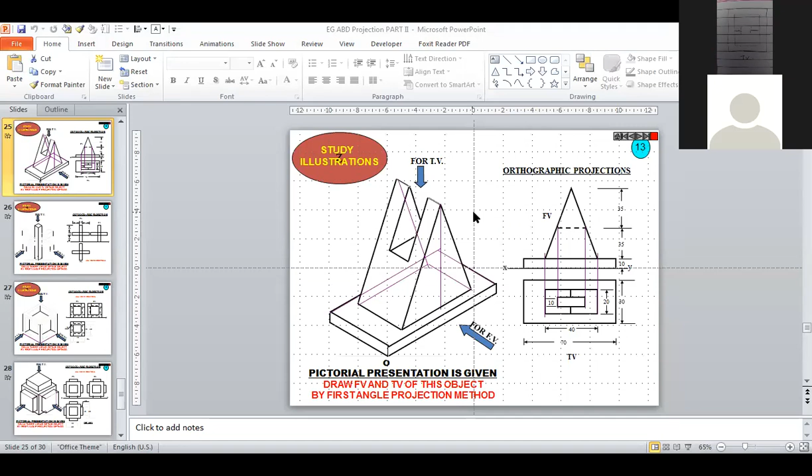Okay, who is showing this? Rishi, take it near. First of all, show me front view. What I told you, you should follow the projection method here. Why are you drawing your top view inside of the front view? Will it come like that? Okay, it seems correct. Now show me top view, and use blank paper so that you will be having practice. Okay, fine. Anyone else?

Tushar, show me. CH020, CH023. Yes, show me. Correct. Nice. You are using projection. You are doing it with a drafter or something like that? Scale. Okay, nice, nice, very nice. Correct. Also draw side view. Those who have completed front view and top view, draw side view.

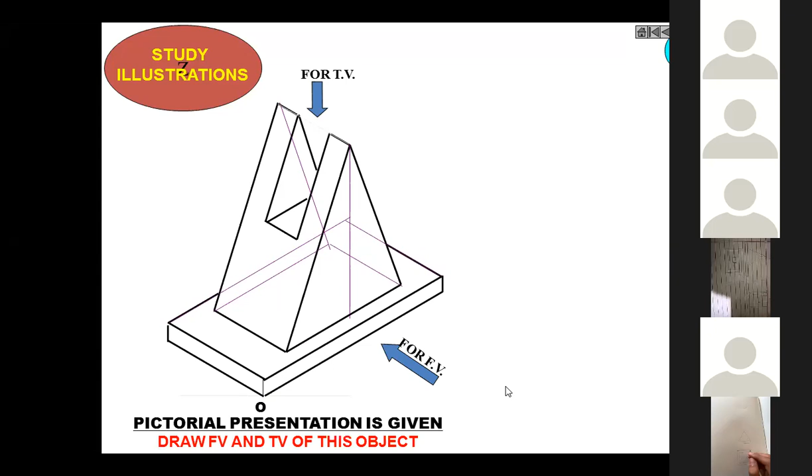Rotate it anti-clockwise. Yes. Okay. Show me the front view. Top view, yes. In top view, you are missing one or two lines. I'm not able to see it clearly. Okay, fine. Now I will show you the answer. You have that question separately, snapshot or screenshot, and answer also.

Now this is the front view. First of all, see the answers; these are the projections, and these are the top views. First of all capture the screen, because it is having dimensions also. Which dimension method is this? Unidirectional. Very good. Unidirectional, correct. So this answer is having dimensions also, so you practice it accordingly. It will give you more and more confidence. When we perform the sheet, it will be very helpful to you.

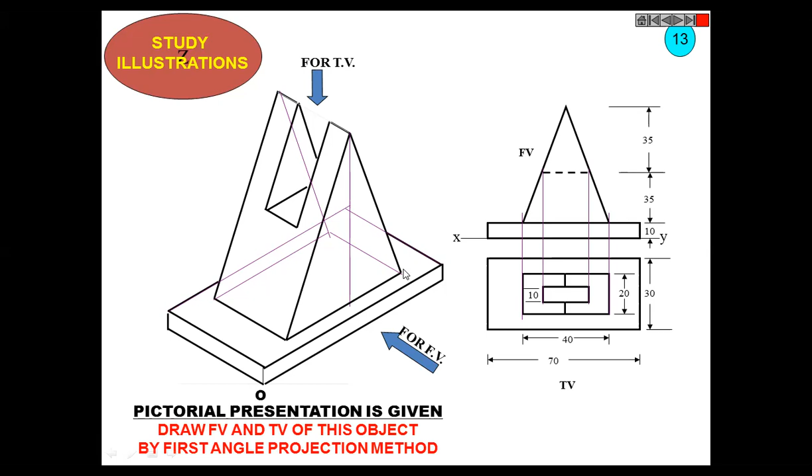See, this simple problem can come up to 10 marks. Understand? So you will get big marks by doing it quickly, and you need not study separately. You just focus within class and prepare your sheet and drawing sketchbook. Honestly, that's it. That is done for the exam, believe me.

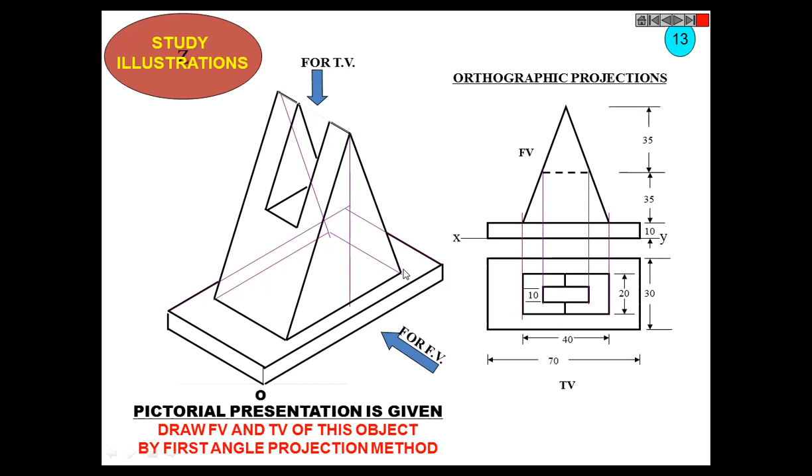Okay, so this is the orthographic projection. Now we will see the next problem. Now do it fast, all three views, front view, top view and side view, quickly. Only 3 minutes I will give, 1 minute for each view. If you complete, then start broadcasting.

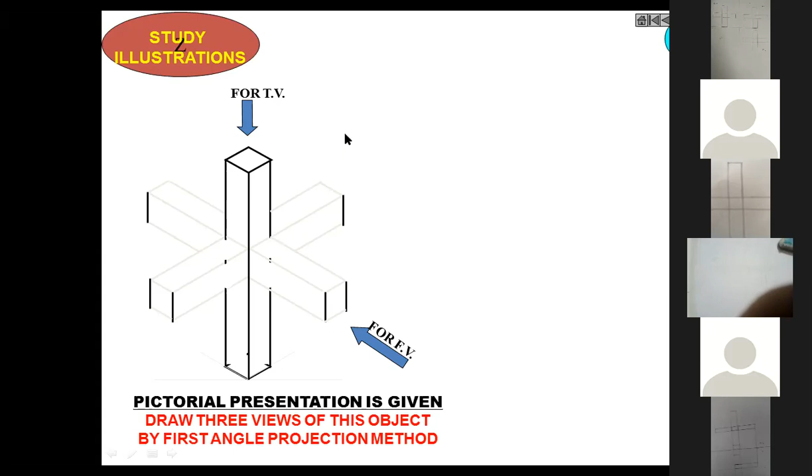Take it near, 21 number. Still. Yes, correct. Very good. Next. 012, 017. Yes, that is correct. 12 number correct. 16 number. Come on, fast. How can I know you have completed unless you show me?

Chalo, show me. Okay, Deacon, take near. Yes, correct. Priyanshi, take near. Yes, correct. Chaitanya, take near. See, Chaitanya, you are taking advantage of these lines. It should not be like that. Practice on blank paper. 018 number, show me. It is a bit blurry. Okay, fine, correct. Okay, this 015 number.

Can you hear me? Yes, sir. So, which projection method have you drawn in? You can't draw all views in a single line. What are the two projection methods we are following? What is asked? First angle. So you practice in first angle only, so it keeps repeating. If it gets repeated, you won't have confusion in the exam. Okay, sir. Practice as if you are doing the exam every time.

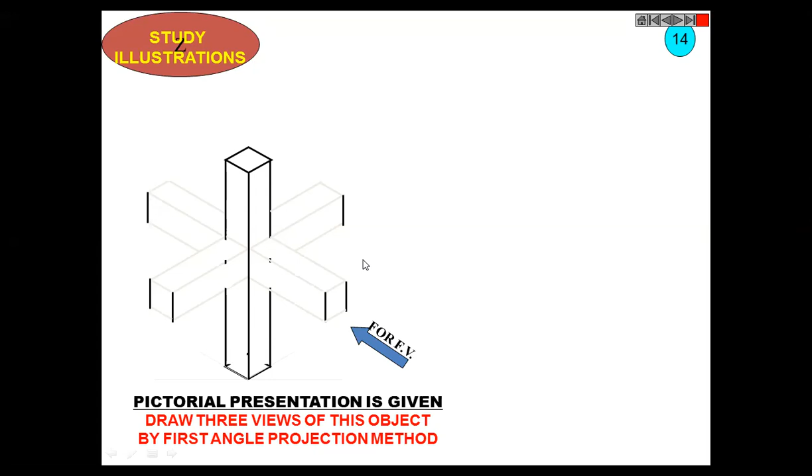Understand? So at times in orthographic view, you may be asked to draw the missing view also. What do I mean? Generally, orthographic projection means you will be given this problem and you are required to draw all three. But at times, for any problem, two views are given and you are told to draw the missing view. Missing view means the third one.

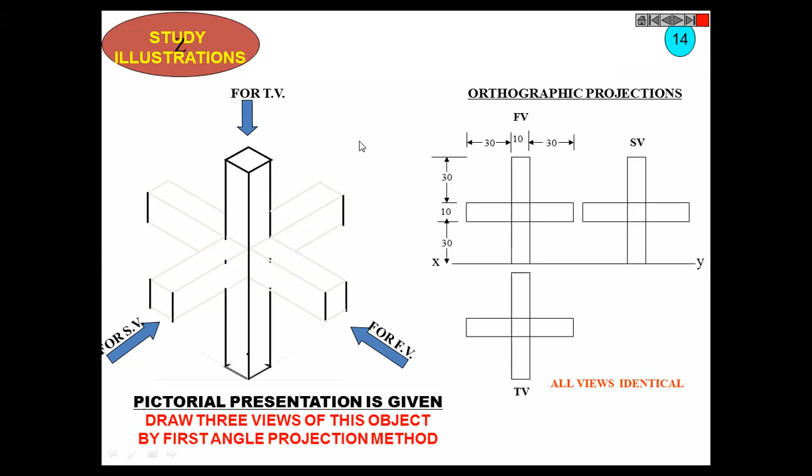We focus on three views: front view, side view, and top view. Any two views are given so that most information is covered, and you will be asked to draw the third view. So you should imagine it very precisely. You should have very accurate imagination power. It's very simple. Practice will make it happen. Chalo, fast. This should be done within 2 minutes maximum.

Now let me divide you. Roll number 1 to 10 front view, 11 to 20 top view, 21 onwards side view. Fast. Chalo, show me. Anyone from 1 to 10 number.

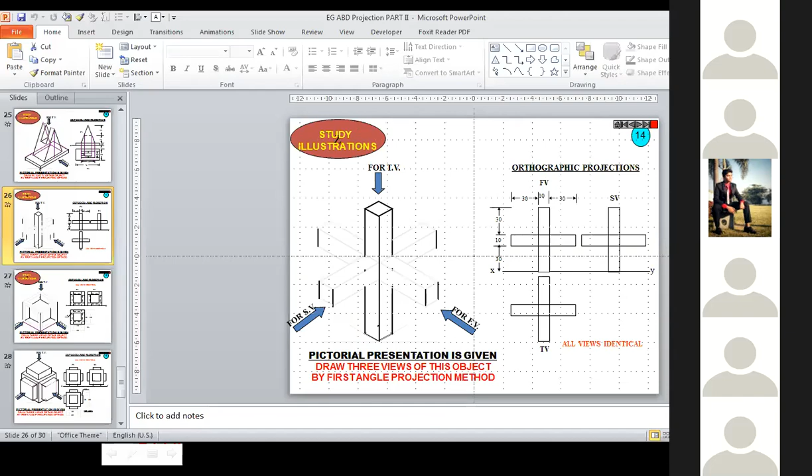Okay, Arjun, take it near. Just a moment. Okay, Arjun, take it near.

We are having this corner, some lines. In every corner, two lines, small perpendicular lines to each other. Why they won't come? Take it near. We are also having axis line. They won't come, this inclined line. Just think over it.

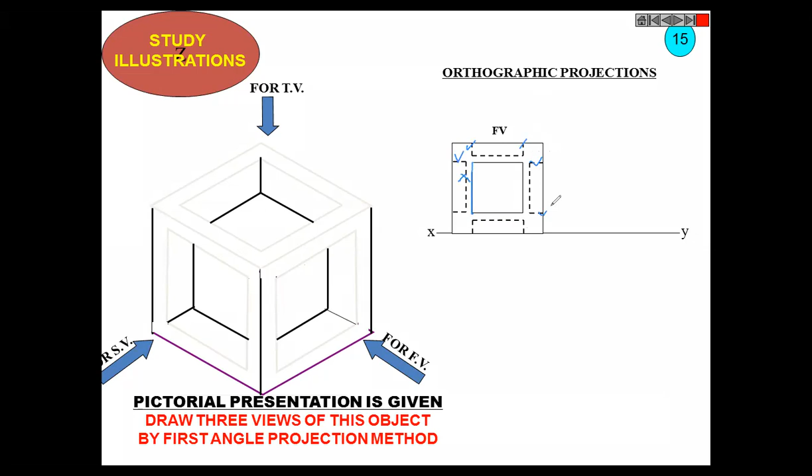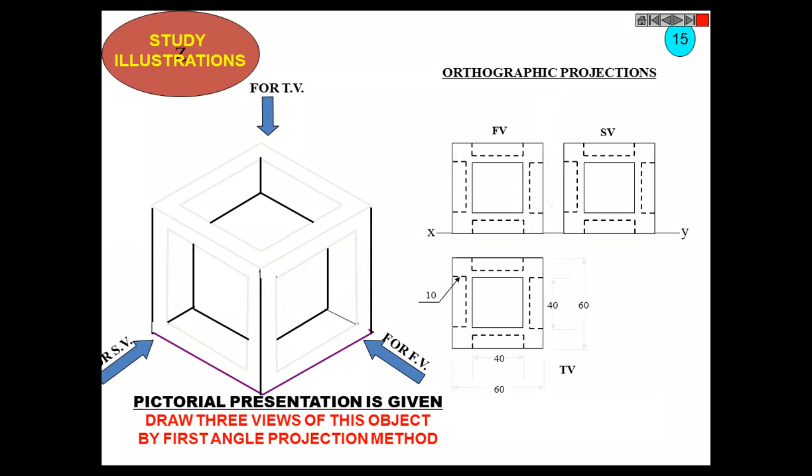Yes, sir. Okay, so let us do one more problem before we move to something else. So all views are again identical, understand? Okay, yes, now last problem. Do it fast, two minutes only.

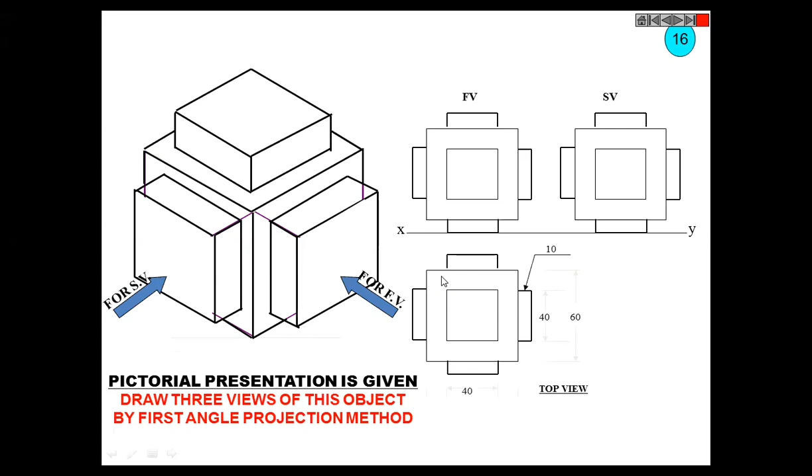Okay, let us see the answer. We just see all these are identical, and the nice thing is that whenever you have such a problem, see all the projections. If you learn projection precisely, everything is projected only. See, this is all projected. If you have one view, all things are projected. Look at this, it should be drawn like this. Everything is projected, everything. Isn't it?

Like this. So these steps what I was talking about should be of same height and thickness because they are same, they are not varying. They all are same. Understood? So these are the Yes.

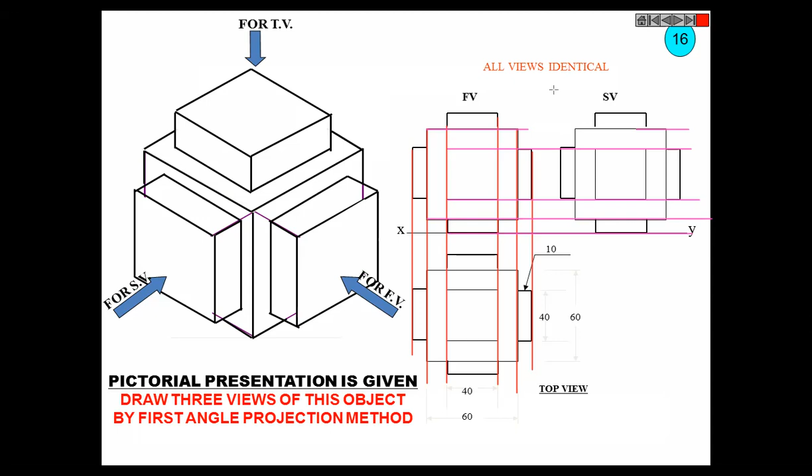Simpler problems. Okay, now we will start another topic. Okay.

Now everyone pay attention to the new topic.

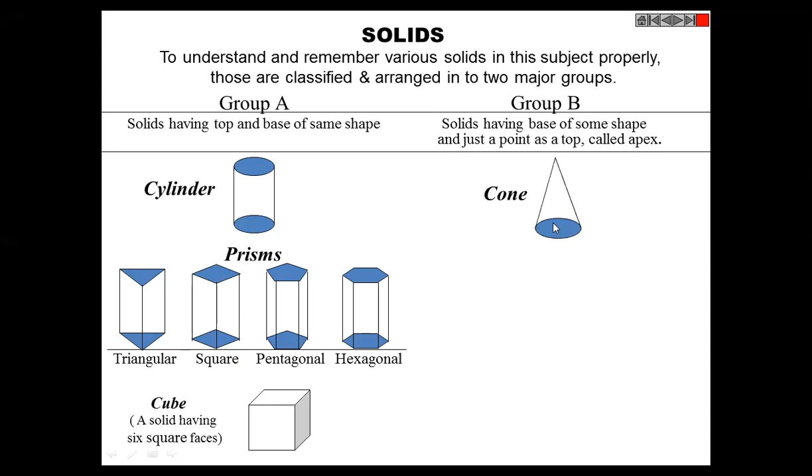Am I audible? Yes sir. Now we will see cone. Here we said cone, so this is the cone. We are having some base at circle, base at bottom, and then we are having a top point only, which is called apex. So this is cone.

Sorry, wait a minute, may need to stop, I'll just share it back.

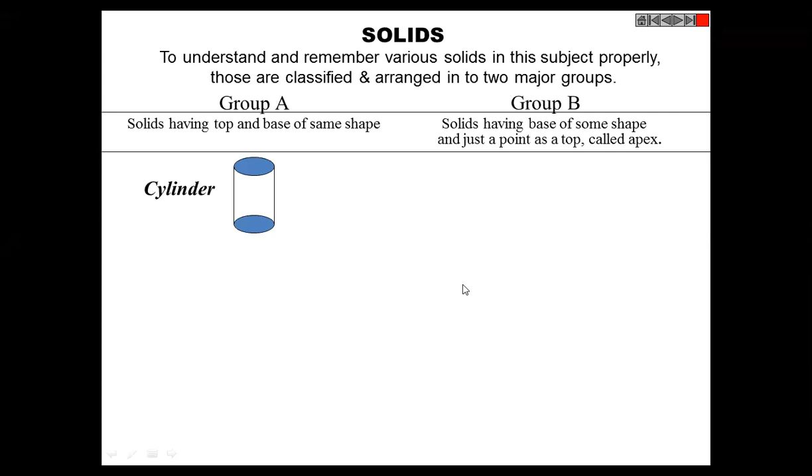Understood? Prism and pyramid, difference between prism and pyramid, got it? Did you get it or not? Yes sir, yes sir, okay.

Now tetrahedron. Now we were having a special case here in square, now we are having a special case here in tetrahedron, whereas all the solid faces are having the same triangle size. Solid having 4 triangular faces, same shape, same size, then we will have tetrahedron.

How many faces are there here? How many total faces are here in this object? Answer is already written. Can you hear me? Four. Yes, four, then answer immediately. So 4, tetra stands for 4 only. Tri stands for 3, likewise tetra stands for 4, so we are having 4.

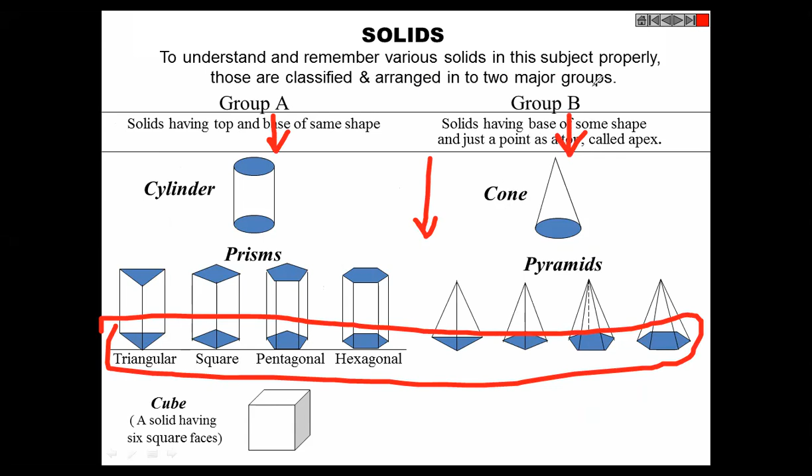Because all these objects we have seen, whether it's a prism, pyramid, whatever, are defined by what? They are defined by their base shape only. Correct or no? Yes, sir. So if you see it from the top, there are more chances that you get precisely what the shape is. Correct? Yes, sir. Okay, so now we'll get back.

So, what is assumed? Either you take horizontal inclination first, or you can take vertical first. If you have planned to take horizontal inclination first, then you need to assume it as standing in HP. If you decide to take vertical inclination first, then you have to start your problem by assuming it is standing in VP. Are you getting me? Now I will show you by example.

Can you see me? Yes, sir. Can you see my planes? Two planes, perpendicular. This is the horizontal plane. This is the vertical plane. Correct? Yes, sir. Now, wait a second. Which shape is this? Can you tell me which shape is this?

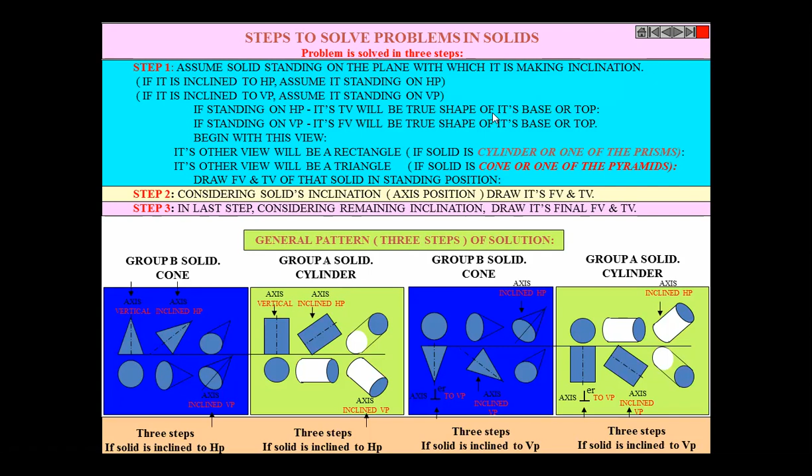Okay. So now what we will see is how the orientation is defined. Now, what is its orientation? If this is one cone, what is its orientation? I can give you this figure and ask, write down its orientation. So you will say that it is standing on HP on its base, isn't it? It is directly sitting on its base. Axis is perpendicular to HP, and it is parallel to VP. Got it?

So if you want to define its orientation, if this object is given, then you need to write everything. That it is a right cone. Nothing is cut, it's a regular cone. Write regular cone, standing on HP on its base, axis is perpendicular to HP and parallel to VP. This is the XY line, so this single line actually represents the plane perpendicular to the screen of the laptop. Correct or not? Yes, sir.

So this is its orientation. So if someone wants to ask you a problem, they will write these things in the problem statement. If they directly give this, that is part of the answer, so you would directly give an answer. It is not like that. That's why in engineering drawing or engineering graphics, the problem is given by these writings. So if this thing is given in writing, what does it mean? It means this. Understood? Now we will see the next one. This is the front view. Now what is the orientation of this? That we will see.

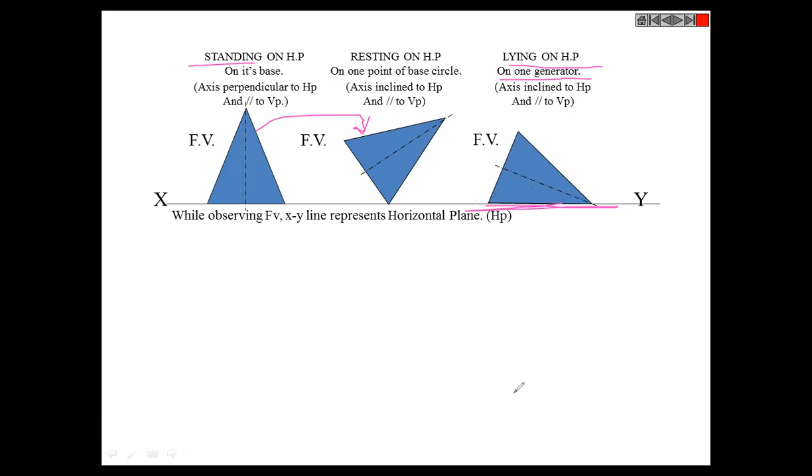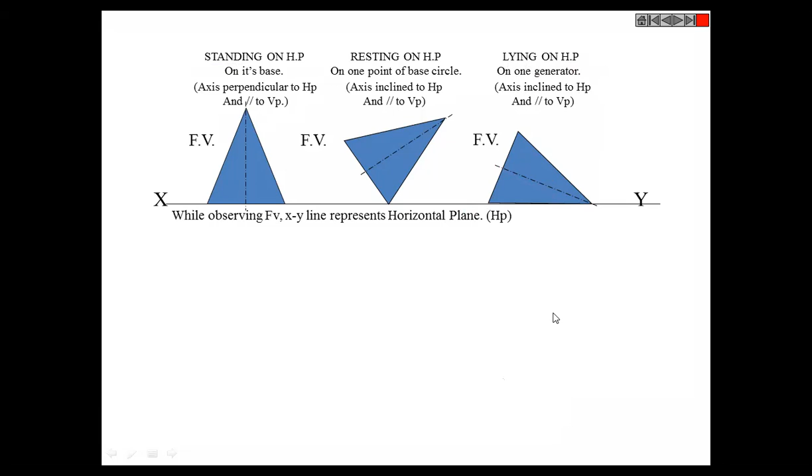Again the point of contact will be one line only. This is a circular portion, na? So the point of contact will be one line, isn't it? So on one generator, the axis is inclined to HP. Yes, the axis gets automatically inclined to HP and still it is parallel to VP. Clear? Yes, sir. Okay, next. Now, all these with respect to VP.

See, the thing is the same, but now it is with respect to VP. Now it is called standing on VP. Why standing on VP? On its base, axis perpendicular to VP now and parallel to HP. Correct? Resting on VP on one point of the base circle, inclined to VP, parallel to HP, and lying on VP on one generator.

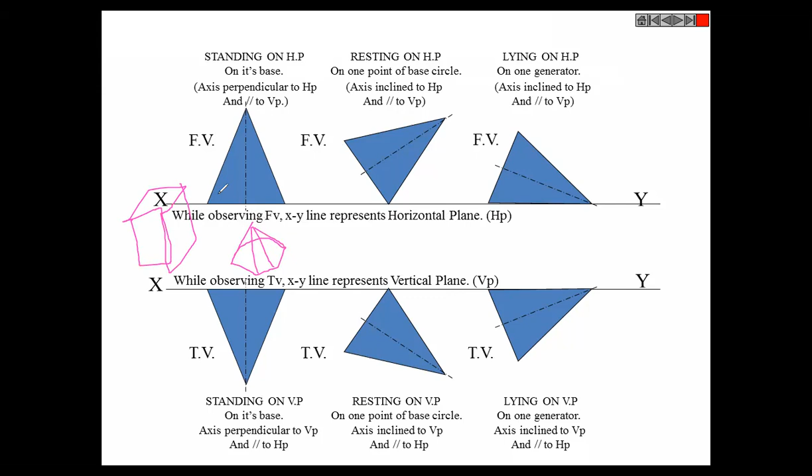Understand? Now these I have explained with a cone. Now the same stands true for any shape, whether it's a prism, whether it's a pyramid, whether it's anything. Got it? The same thing will stand true. What is called standing, what is called resting, what is called lying, in HP, away from HP, in VP, away from VP, etc. So this is the gross example. Now every position can be defined by this. Got it? Clear everyone regarding these basics of projection of solid?

So now we have got time, isn't it? You are having lab after this? Anything? Any session after this? Okay, sir. Sorry. Are you having something after this? Answer me. Yes, sir. Okay. I thought you were discussing in your non-official WhatsApp group. Then let us see, give answer.

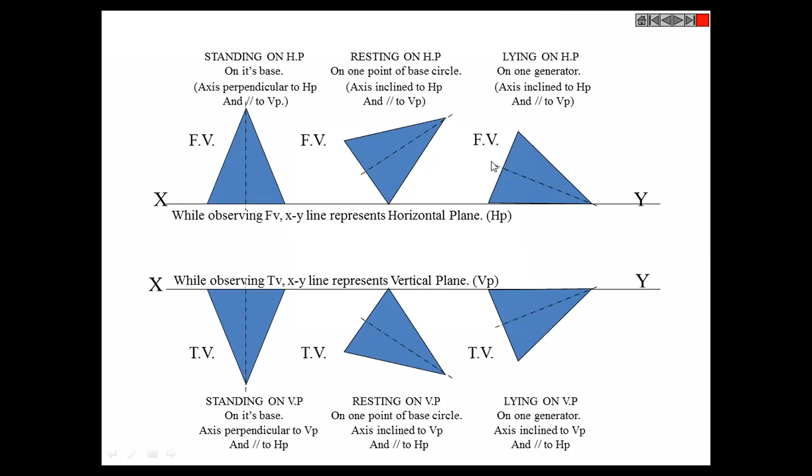Okay, no problem. This is the basics of projection of solid. From tomorrow, 10 a.m. to 12, we will be having that class, and from that we will start solving problems. If you want to ask any question regarding this session, ask me right now. If you have any doubt, any question, please ask me. Is there any doubt to anyone? Yes, go ahead. Who is that? Go ahead.

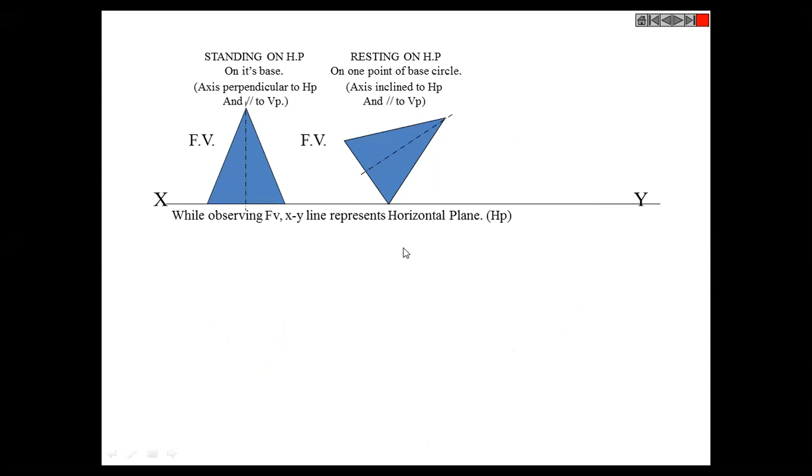That's why I repeatedly tell you to attend classes regularly, because we have discussed this in projection of planes. In that class you were absent. See, just a moment. Can you see my cursor? Yes, sir. See here. This is what I explained in this slide. It is the most complex problem, maximum complexity is that only. It is inclined to HP and VP both.

So either you start by assuming it standing in HP or in VP. If in HP, then first give it inclination with respect to HP. Then you draw projections, and then give that view inclination to VP. Any inclination to VP, in which plane will you be able to see it? Which plane I am asking. Horizontal plane. In which view? I will definitely ask this in exam. Mark it. Top view.

If it is inclined with HP, then in which view will you be able to see that inclination? Front view. And which plane? Vertical plane. Right now we are assuming we have only the vertical plane and horizontal plane. If we have the profile plane also, we can see it in that also. So either we first take inclination with HP, then its top view makes some angle, and that's the final answer. Or first standing in VP, take inclination with VP, then front view, give it inclination with HP, and this is the final answer.

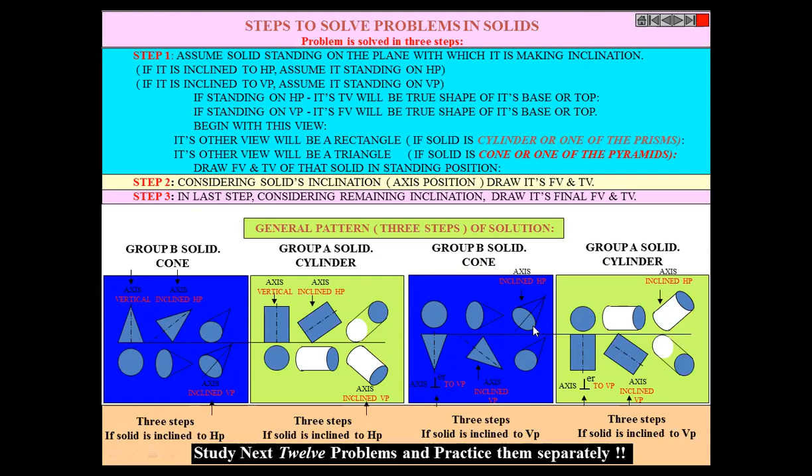Okay, so any doubt, anyone want to ask anything? No, sir. Yes, speak up.